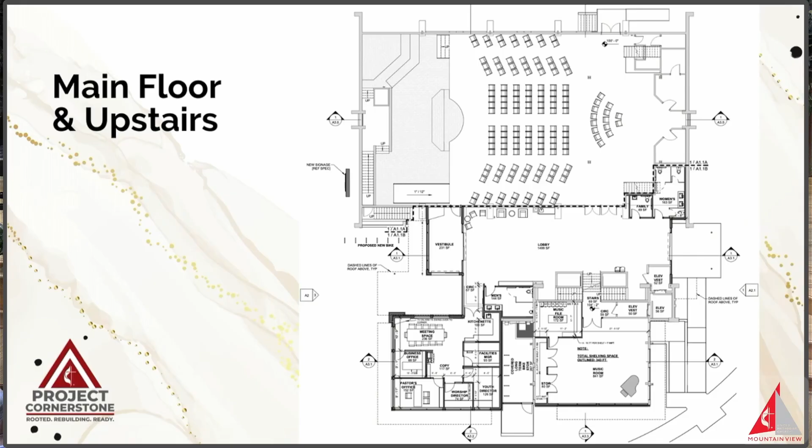This is the full main floor, so you can see the sanctuary seating at the top, the narthex, and then the new wing of the offices and the music room. I pulled it out so you could see it a little bit more — this is just the sanctuary and then the narthex space.

There are just a couple of things I want to lift up in this sanctuary. We will be working on the balcony. That's one of our hopes, is to take out the solid wall on the balcony and instead put in a railing so that the people who are in the balcony can feel more connected to the worshiping community. And that would be true for concerts as well as for us when we gather.

On top of that, we are going to move Scott's sound booth from down here at the bottom to the top of the balcony, because if you've spent time in the balcony, you can't use that north side because you can't see over the sound booth. So if we move it to the top, that's going to help out.

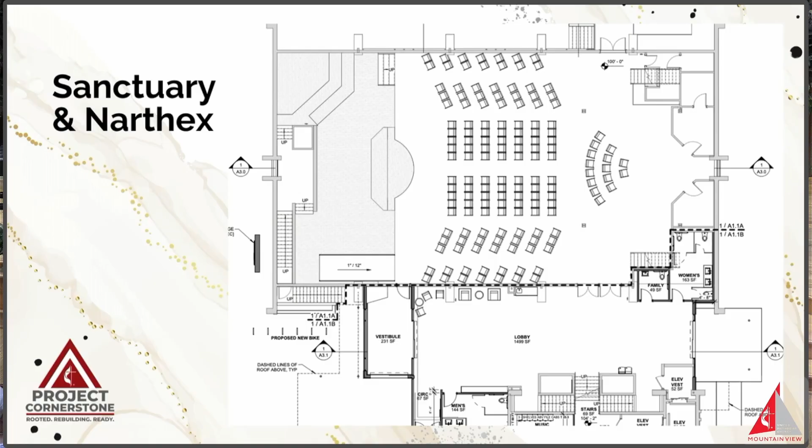In the narthex, we have expanded a little bit to the west. We are putting in a new entry space that will be substantially larger. And then we're adjusting some of those spaces to better fit our needs, have a little bit more seating, and utilize the space in a slightly better way.

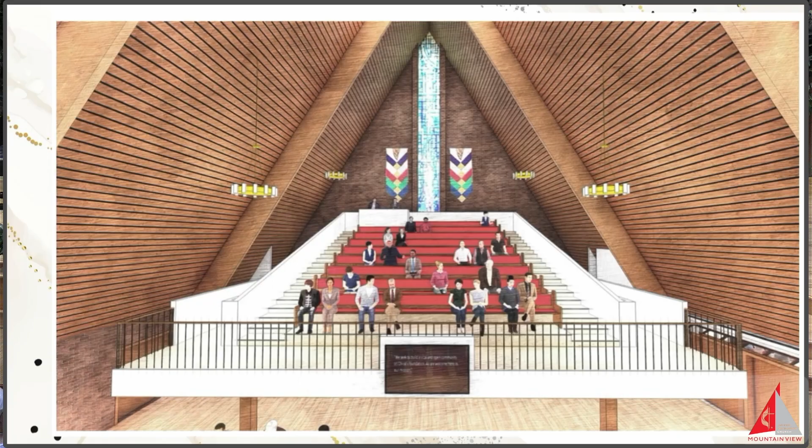So here's a couple of renderings that Rodwin has put together, and I just want to name that every picture or design you're seeing here is Rodwin's work — I have totally inappropriately cut their name off every picture so it could be as large as possible on the screen. So please know all of this comes directly from Rodwin.

So this is our balcony, as you could see from where I'm standing, with the new railing, and you can also see that the sound booth has been moved to the top.

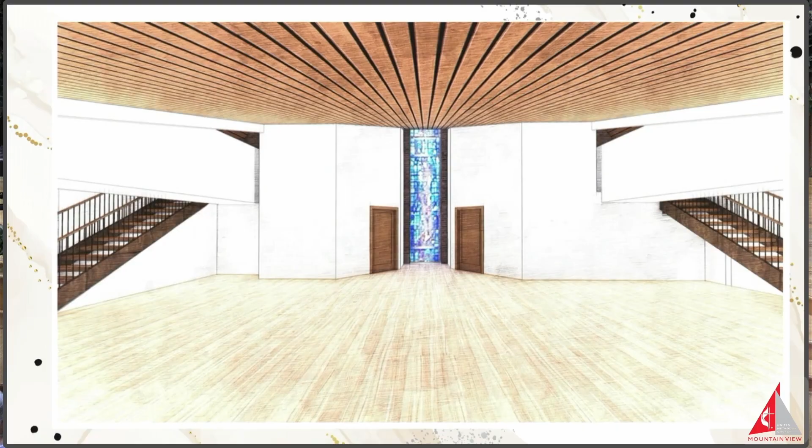One of the things we're hoping to do is take the tongue and groove wood paneling that's in the view room and bring it to use underneath there, so that we can extend this beautiful wood that's around the sanctuary even into our chapel space, making it feel a little bit warmer and more contextual for that space.

Then the back stairs, if you've been around for a long time, you may use those. If you haven't, you might not even know there's stairs over there. But those that go down to Barker, we are going to close off. It will still go upstairs, but not come downstairs, because that's going to become a storage space downstairs, giving us a lot of room for storing tables, chairs, and other necessary items, which would be great since right now we store all our chairs and tables in Barker along the north side. So we'll have a place to put them. You're seeing that a little bit in this photo, how we've closed off the downstairs space.

I'm going to let Sarah talk about offices.

So the offices you will get to by going through the narthex, basically where the door is right now, and continue to the south, and there will be this lovely new office suite. One thing it will have is five offices for all of our main staff members. But it will also have, as you can see at the top of the drawing, a big meeting space with a conference table that'll hold about 14 people with nice comfy chairs. It'll have a full AV system so we hope to use it as one of our main meeting spaces, and it should be really lovely with a nice view of the mountains.

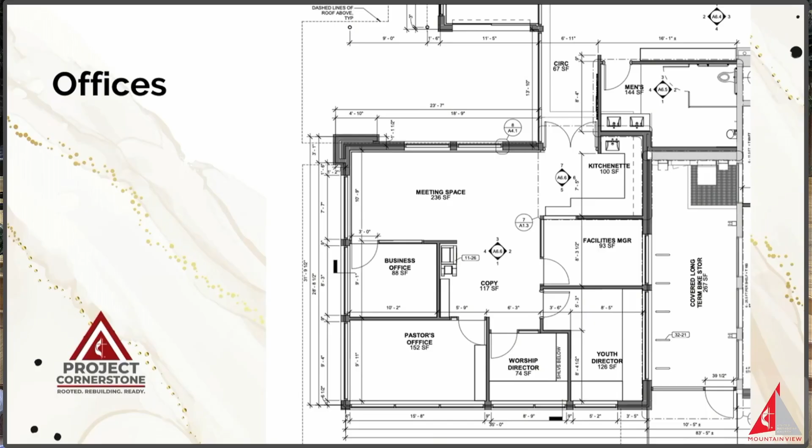And then this is from the top of the conference table looking back toward the narthex. You'll see the big connection point, the big door that will allow nice connection between the two spaces. To the right, there's a little kitchenette space, where there will be a couple of little fridges, storage space, coffee, all sorts of things. You'll also see windows out to the new entry space. I think that's Kyle's office on the right, that wooden desk space with a window, so that when people come into the building, they are greeted by a nice smiling face.

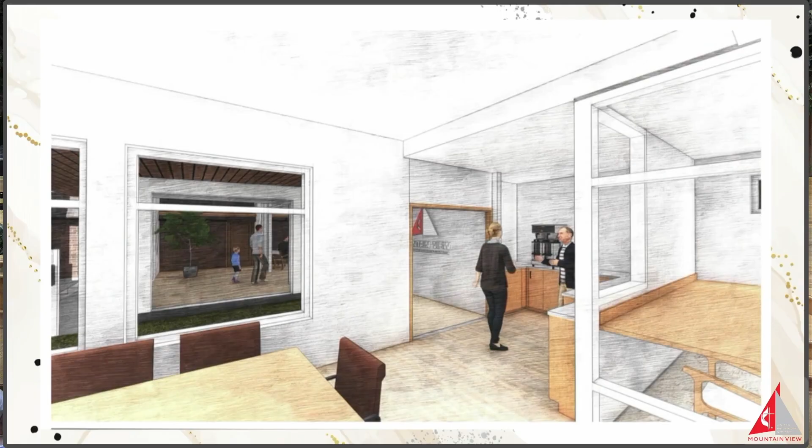I'll remind Kyle that that's his responsibility.

We are moving the music file room from downstairs in Barker to upstairs into the music room, and there's a lot of storage. We actually worked directly with Brian to have Rodwin measure out every square foot of storage, so we knew exactly how much we have now and how much we would have when we moved. Brian is feeling confident about it, as am I.

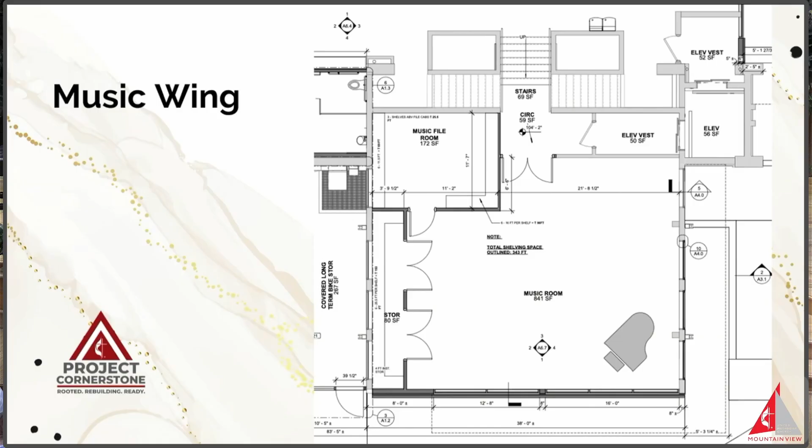We do not have renderings or photos for every area, so where we have them, I've shared them, and where we don't, we will in the future. All right, Sarah.

Part of the reason we don't have renderings yet for some parts of the building is because we are phasing it. We're going to do Barker first, so we know the most about what's going downstairs. As we get farther into it, we'll have more detail.

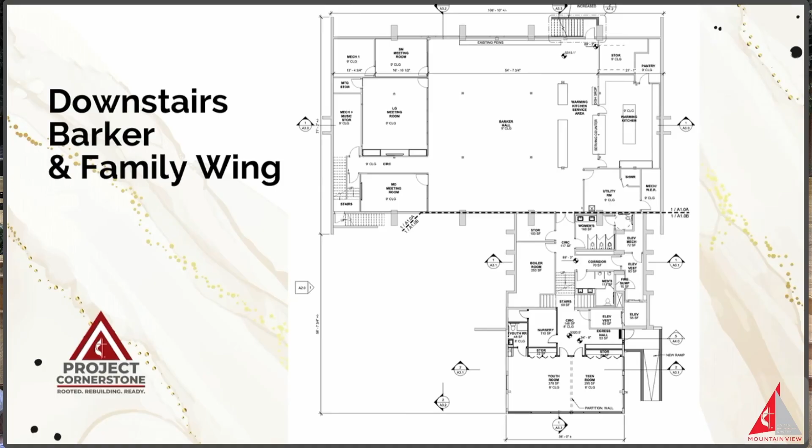So the downstairs will be Barker Hall, and also the lower level over there, which is currently the offices, will be the children and family wing.

Barker itself, the major changes are — you know how there's the wall that goes in front of the kitchen? That wall will go away. The kitchen itself, which is a warming center, is not a kitchen. Nowhere will it be called a kitchen because the city of Boulder will go bananas about that. So it's called a warming center, and that's why.

But the wall in front of it will go away, so the stainless steel counter that is in front of the kitchen will extend a little into the hallway space, so there will be a little more serving space there.

Then you'll see the two rectangles that are vertical in that photo — those are going to be permanent serving tables. They'll have a nice quartzite top that's super durable, with lots of electric outlets on different circuits so that when we have a potluck dinner, we won't blow the fuses.

Well, I guess we don't have fuses anymore, but you take my point. Anyway, those will be permanent. They'll have cabinets underneath, and openings so that carts with dishes on them can be rolled straight up to unload — super easy. On the other side, you'll see where the new meeting rooms are.

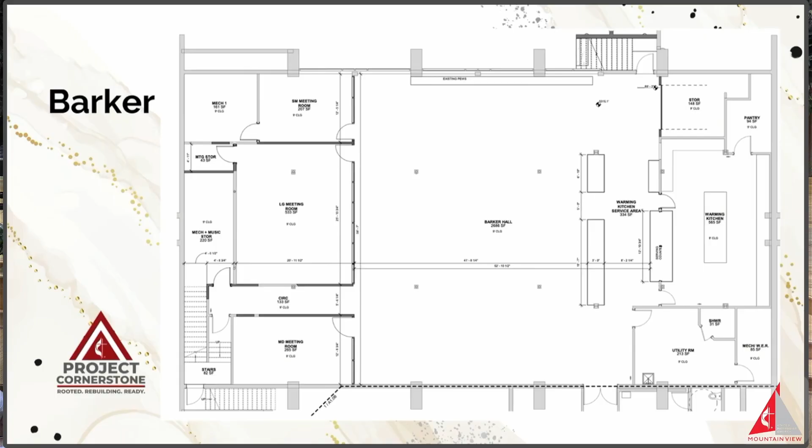That's where the storage room, the stage, and the music storage room — those three items go away and become three really nice meeting spaces, which I have pictures of that I'll show you in a moment.

So this is what it looks like with furniture in it — the exact same drawing you just saw. This is not necessarily how we'll configure these tables, but the goal was to see if all the tables and chairs we use for the maximum big things downstairs will fit. Yes, they fit really nicely.

One thing we're going to do is leave the pew on the north wall, because people have said that's really nice seating, and it's history, so we're leaving it. Then a little bit you can see the layout of those various meeting spaces.

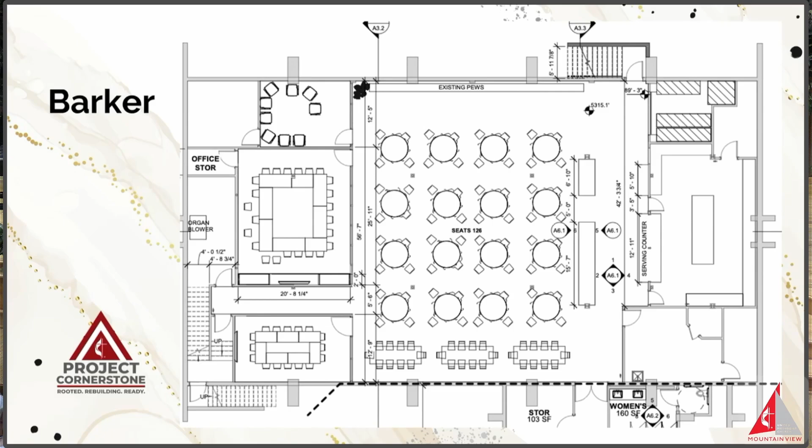One of the things we're hyper aware of is sound. The meeting rooms will be very well insulated on the ceilings, walls, and floors to prevent sound carrying from one space to another. The floors in Barker will be acoustic to absorb sound from feet, and the ceiling will be acoustic to absorb sound going into the sanctuary. That's the other benefit of closing off this staircase in the back — it prevents sound from going up and down.

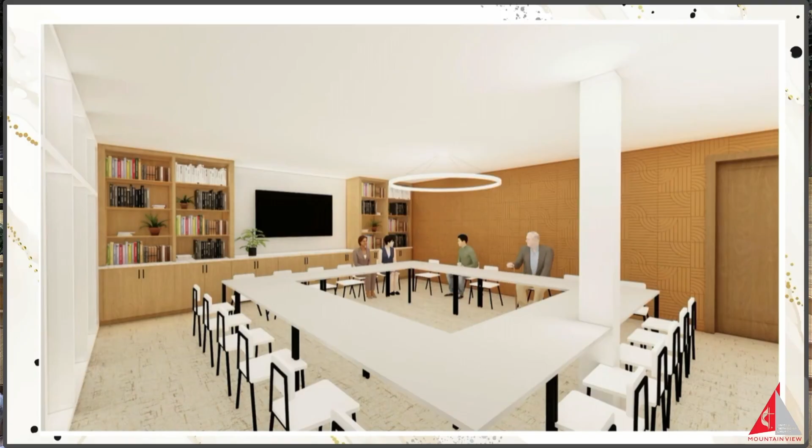This is a rendering of the new Fraser. I cannot promise you it will look precisely like this, but this is sort of what we're going toward. You'll see it has a nice warm carpet on the floor. Again, I have a sample out there. It has built-in bookshelves and cabinetry in the back, and we've been working with the UMW folks about making sure that they have enough space to store their books, and we believe there will be more than enough. And then we can put a gigantic TV on that south wall so that you can see things, hear things, and that'll have full AV capability.

So then, as we move to the south in the basement, we get into the family ministries. Now, there is a portion between Barker Hall that you were just looking at and this image we're looking at now. It is what is existing between Barker Hall and the offices, so it is the boiler room, the bathrooms, and a couple of other rooms that are not being changed. So I didn't put them on this image, but if you look at the big images in the narthex, you'll see that transition space exactly as you currently experience it.

So in the children and family area, we have a couple of specific things I want to lift up. We again have worked directly with Larissa to try to make sure that we have enough storage, that we're really thinking about what things need to be put different places. There is a children's bathroom next to the nursery, so that will serve both the children and youth room, but also if we were to have kids in the nursery, there would be direct access to a single stall bathroom. There is storage right along both of these big rooms. You can see two different large storage closets.

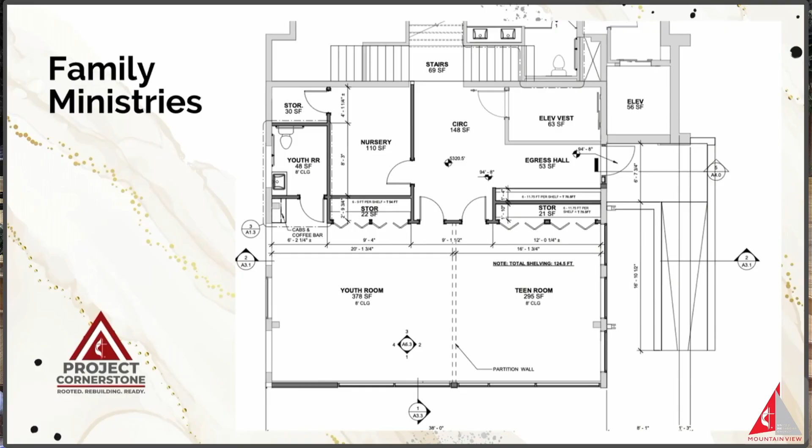All right, so those are the basics. There's lots more information out in the hallway, and I'd be happy to walk through any of that, or you can ask Scott or Sarah or members of the team. Tim knows a lot, Renelle knows a lot, Paul McClung knows a lot, Bonnie knows a lot. Everybody who's been on this team has walked through these plans time and time again. So please, take a chance to ask some questions.

I'm going to have Scott speak for just a minute about the HVAC and geothermal. Thank you. So just a shout out to your green team with Fred and Arthur and Tim in particular. They have really done an extraordinary amount of work to help us understand how the building works, and to put together a report that frankly exceeds what our mechanical engineers are capable of doing, because of their expertise in understanding how energy works and how your building performs. So that's the start of that.

The upshot is that we're shooting for a dramatic improvement to your overall sustainability and energy performance in the building, starting with adding significant insulation to the outside of the main sanctuary. All of that is to help enable the proper sizing of the mechanical system. Our general premise has been that we're working with a ground source heat pump, which is also known as a geothermal system.

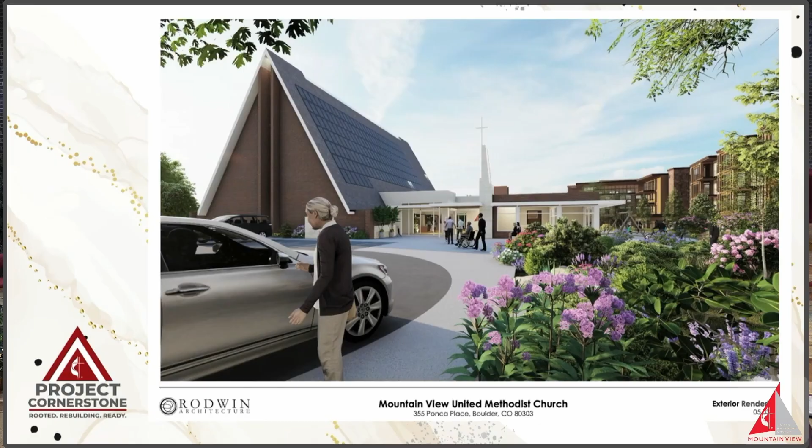One of the things that we really loved about it is how it balances the front and anchors it. It becomes a wayfinding point, so you can tell people, oh, the front door, it's right by the spire. It just makes it easy to know where the front door is. It's a little hard to see in the rendering this far away, but yeah, it's about 25 feet tall.

Any final questions? Yes. Is the project Energy Star certified? It's going to be dramatically better than Energy Star. We've been doing LEED Platinum and Energy Star buildings our entire career. I don't know specifically which level of Energy Star it is likely to hit. It's getting into the weeds and the nerdy stuff, but for all intents and purposes, it will substantially exceed basic Energy Star. We're going to be shooting for a radical transformation of the energy performance of the building with the intention of becoming as close as possible to a net zero energy building.

Yes? Do we keep the solar panels when you install? Yes. So the solar panels are about 16 years old, I believe—14 years old, close. They have a pretty good orientation. I would say there is the possibility of adding future solar panels on the flat roof portions of the building. It doesn't have to be in the first phase, but it could be, again, to try to get as close as possible to net zero.